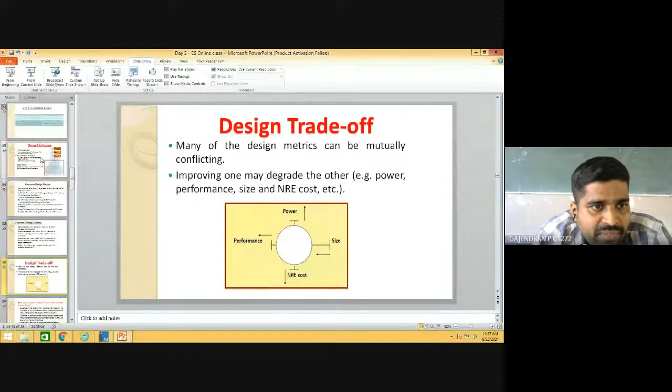Today's class is a continuation from our last class discussion. Last class, we stopped our discussion somewhere in the design metrics and challenges. Am I correct, sir?

What do you understand from the design challenges? Any one or two keywords you remember about the design challenges? Simply type the keywords you remember regarding the design challenges.

Industry space - okay, then anything else? Employees, okay. Then materials used, very good. Then quality and cost, okay, anything? Yes, very good, very good.

So whenever we start designing something, in our case we took a mobile phone as the example. So whenever I start designing something, I think about how to start my manufacturing, so we will start from scratch. We will have some pre-works - pre-works means what type of thing I need to manufacture, what are all the components I need. Those kinds of paperwork we will do.

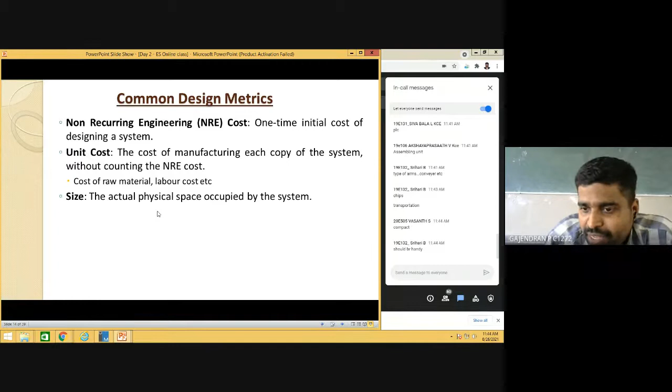For the same price, for the same mileage, what size do you think a four-wheeler should be? Is it that you will think again compact? No, more spacious, so it should be bigger. Am I correct? For the money we pay, we want more space.

The size, in the sense, is not always small. It depends on the application, it will vary. For most embedded applications, a small form factor is needed.

The form factor means many features we are going to accommodate in a smaller size. For example, if you consider an embedded system, I need RTC, I need analog to digital converter, digital to analog converter, display interface, camera interface, and PWM generation. Likewise, if you think about the hardware, you will list many things.

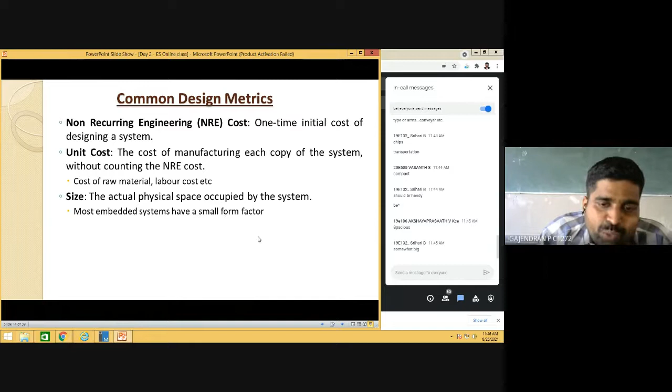As far as the user is concerned, the user will ask for Wi-Fi connectivity, Bluetooth connectivity - what else will you ask? Dual core, 4-core - like this you will ask for many features, but all these features need to be accommodated in a very smaller size. So that is the form factor - how we accommodate the features inside your chip as well as your particular product.

Then performance - yes, performance. It's throughput - throughput means the time taken to produce the particular output. Throughput should be at a higher rate. For a given time, I am accessing Google Meet, and also I am accessing Instagram, and also I may access Facebook.

Like that, I am doing multitask in my mobile phone. Am I correct? At that time, what should be my performance? It should not degrade, am I correct? So performance wise, whenever you do the design, you need to give some consideration to the performance also.

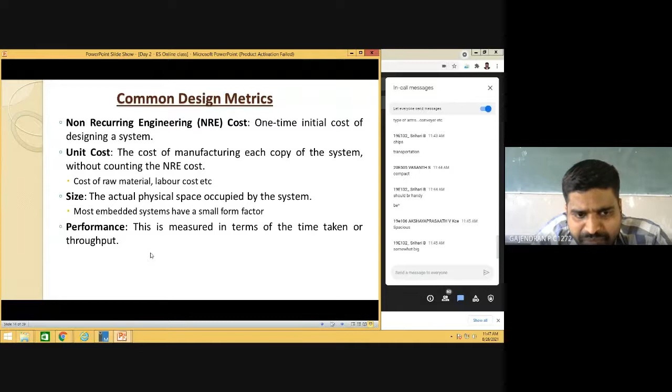Then one more parameter is the power consumption. Nowadays it is a very big research area, especially in the Internet of Things. Say in IoT without embedded, IoT is nothing. You know well, am I correct? So whenever you talk about the Internet of Things, if you want to connect the things, obviously you need some controller, am I correct? So how long my battery will stay back and it will serve my function.

Okay, for the tiny applications and all, they are spelling the power duration in years - 10 years, 5 years, 6 years. Like that, they are giving the power backup in the particular application. That is without recharging. One time we charge and give it to the application, how long it will prolong. It's a very big thing.

For that you need to concentrate on hardware as well as the software. Using software also you can do plenty of magics to get the lower power consumption.

Then flexibility. What is the meaning by flexibility? Able to change the functionality. May I ask you one thing? Is it you people are changing or updating any functionality in your mobile phone after you buy? Say yes or no. Are you doing this functionality updates or changes in your mobile phone once in a while?

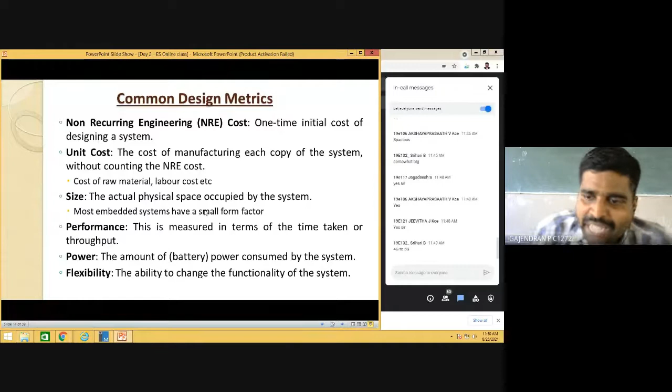It is not simply within a time. If you download the software, your mobile phone won't support from 4G to 5G. But other functionalities within the hardware you can do it. So the hardware design should be done with an extensive mindset. Within a year, if hardware fails to update some advanced things, no one will like that product.

Okay, yes. So please note down this common design metrics. First two are related to money, especially remaining things also related to money. But remaining these four points are a little more technical points. So please note down this. You no need to write everything, at least you write these keywords.

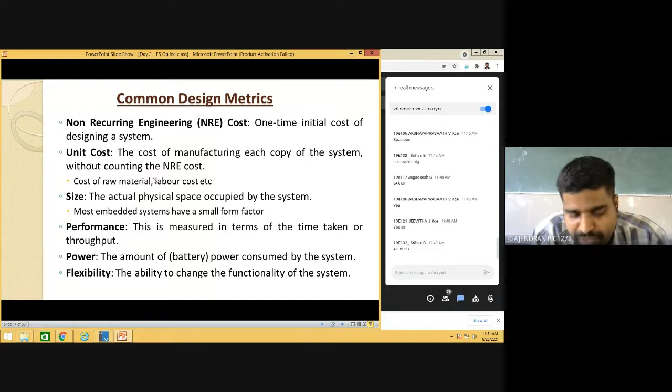few more design metrics - maintainability. How easy or difficult it is to modify the design of a system. Most of the time, especially two-wheeler, the youngsters always love to change the design, am I correct? Manufacturer gives the design, and he will change it - they will change the silencer, then they will change the braking system.

How flexible or easy it is to do the modifications. We will buy a petrol engine, later we will think we need to change it to diesel or gas. Like that, people will think how to modify the same product with some other feature. So whatever needs to be done, if our system is adaptable, that is called maintainability.

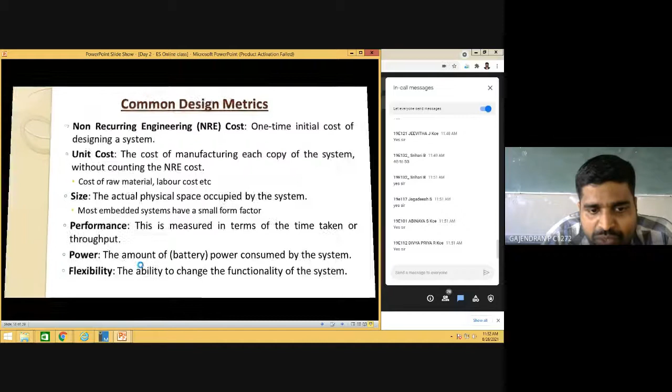Then time to prototype. So this is a very, very important key factor. We constructed the factory, we estimated the cost for the unit, then we consider the remaining factors also. Now we are starting to think about creating a mobile phone.

Okay, same example, I am sticking with the same example. Actually the process of these things, how it happens in the industry - first the R&D people, the research and development team, will design something. The very first work will be taken care by the research and development. The R&D people will do some designs, then they will come with some mathematical equations, then simulation, then they will give some approval to the production people to do the production.

Is it the production people will do the mass production? Is it the production people will start the mass production on day one itself?

Do they do mass production? Say for example, day one they give the design to manufacture, day two they start manufacturing 2000 phones per day. Will they really do that? No, because the R&D people themselves have doubts in their design. So what will they do? The first and foremost thing they will do is a prototype.

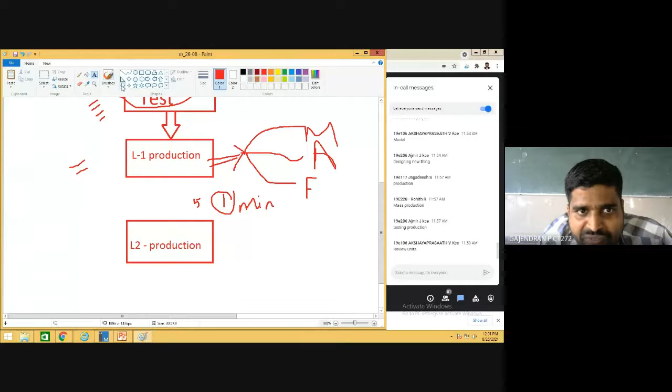Is it clear to everyone? Any doubt in this? Is whatever I said really happening or not in our day to day life? Please say yes or no. That's enough, please say yes or no.

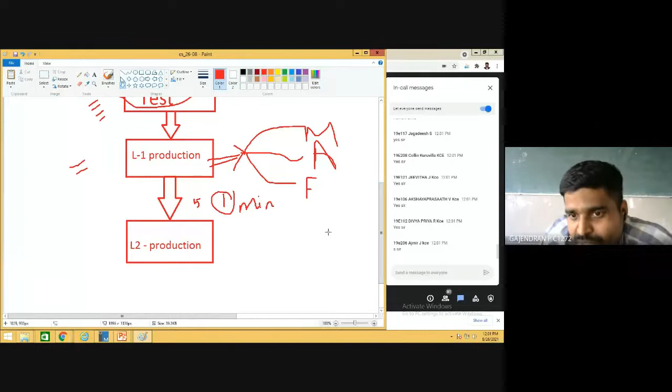Yes sir, obviously, knowingly or unknowingly, we people are doing some testing work from our side. We test it, sir - those companies are using us as testing engineers, because whatever coding they have written in the mobile phone, it is not possible to test every line of code. So for that purpose only, they throw the product in front of the customer and allow the customer to access it, taking their input. It's a very, very big thing related to the prototype, making the product and selling.

Time to market, very, very important. There will be a big clash in the film industry too - time to market, am I correct sir? They have different products in their hand in the name of films. Am I correct? The story is the core there. Time to market.

Should we release for Deepavali or release for Pongal? If we release for Deepavali we can earn this much. And also, who are the competitors releasing at the same time? It's a very huge industry.

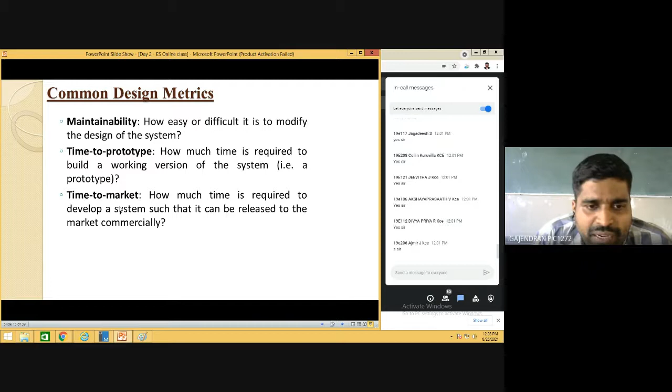Don't think the film industry is just an entertainment industry not using much technology. The film industry nowadays uses all the technologies we are speaking about - artificial intelligence based movies are starting to release, AI based songs, AI based fight scenes, they are doing like that. Wherever money is flowing much, like cricket or other sports media, they will use technology there. If you watch the Olympics, they used many technologies. So wherever money flow is high, technology will be used in a very extensive way.

If you take the mobile industry again, you have multiple competitors - Samsung, Redmi, Nokia and others, am I correct? Once upon a time they were the masters in the mobile industry. Time to market plays a vital role because you spend huge time and money to create a product. If you fail to sell at the right time, you will lose the entire market.

If you know the history of even the browser we are using in our discussion - the Google Chrome launch also got delayed for a week. Before that itself, the things were leaked, and Sundar Pichai was a little disappointed with that. But no one could clone it within a week, am I correct? Because those people had plenty of features in that particular browser. Before launching itself it was leaked, but no one was able to duplicate it. Without making much delay, they launched the product.

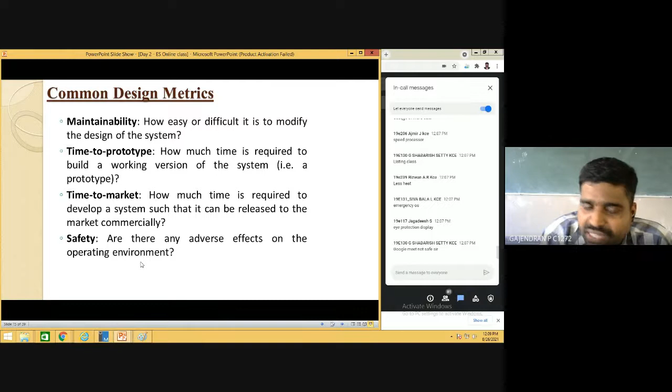Okay, yes, that's all. Now you will see some trade-off points related to what we have discussed so far. Okay, many things are getting mutually conflicting. Then the power, performance, size, and the non-recurring engineering cost we need to improve. Okay, if you consider this circle,

our ultimate aim is to have this as a circle. Okay, if you pull this shape, the shape changes. Then to bring back that shape, I need to sacrifice something. Okay, so this is a 4 category, initially we discussed with 3, now here we are discussing with 4 categories.

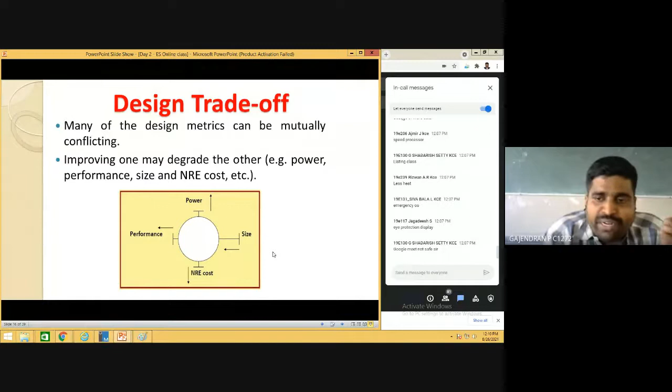Okay, think about this. And whenever you are doing any project or product, or whenever you people may do any startup, at that time you need to think about these points in a detailed way. Okay, and it's very, very important. You people should know why you are studying the embedded system. Okay, many of them are thinking why I need to read about the software.

I plan to become only a software engineer, why do I need to read about hardware? And there are a few people telling that I am going to become a hardware engineer, why do I need to think about software? See, software and hardware always join hands to create the product.

Okay, if you take a human body, the software is like the brain and organs, and the skeleton of our body is your hardware. Without the skeleton, you can't fit these eyes and other parts in your human body. Okay, the skeleton or the backbone is your hardware. Using the backbone, we are enjoying many things, that is your software. These 2 things need to join hands whenever you are doing any work.

Okay, so why we are discussing this point here means whenever you are designing any product, you need to think about these things, hardware and software. The hardware and software both are related to your money - how much I am going to invest on the hardware, how much I am going to invest on the software is very, very important. And one more thing,

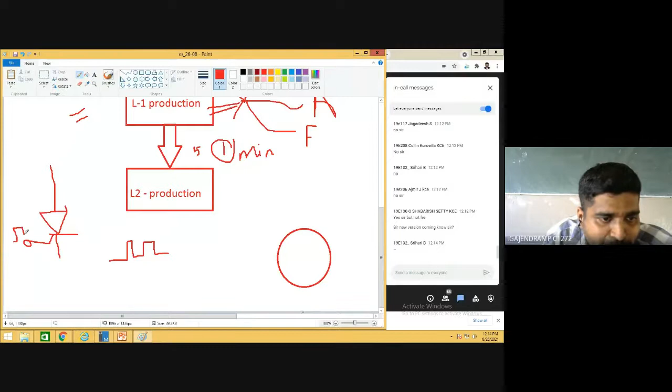Why do I need to remember these things? See, since we people are from EEE background, you people will study power electronics, and at that time you will think about the firing angle, how to trigger my device. You people know about the SCR, a semiconductor special device. Here, if you give the gate pulse, you can do a lot of magic with this device.

So how to create this square wave? Even using the digital input output pins, you can do this. But these PWM techniques are very powerful things to create this gate pulse. Likewise, you need to think about your hardware in an extended way. And one more thing - what the industry likes is, whatever hardware features you are thinking, try to get all the features in a single silicon chip.

If you choose one IC, you should bring everything into that IC itself. If you tell the industry person you are giving something and you add one more chip externally, they won't encourage it, because it will kill your form factor - the size of the product will get enlarged.

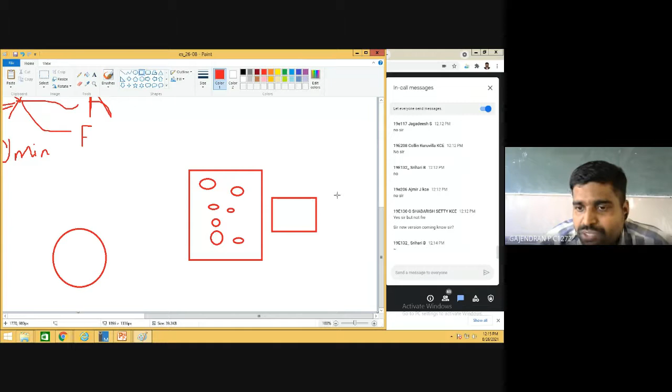So what you need to do is, whatever features you are thinking, choose the component, choose the chip or the controller itself having these features as an inbuilt function. Then for software, obviously you need to think how smart you can control this hardware, how smart you are writing the software design. Hardware and software co-design is very important.

And one more thing - if you take one master industry in the embedded system, very well known to you people, it is Robert Bosch, an industry. I hope you people know. There the recruitment will happen in 3 levels: one is hardware, second is software, and the third is co-design, hardware plus software. So the demand is huge in this sector. Hardware people are available enormously, software people are enormously available in the industry, but clubbing these two, that is called co-design - engineers are in very high demand in the industry.

You think about any industry nowadays - IoT industry, artificial intelligence, deep learning, any technology - you need some computational device to do the particular task. So there you need to write some coding, and that coding needs to be dumped into the hardware. Then you need to connect some peripherals. For example, I'm doing some artificial intelligence face recognition system - I need a camera, I need some controller, I need some algorithm to run.

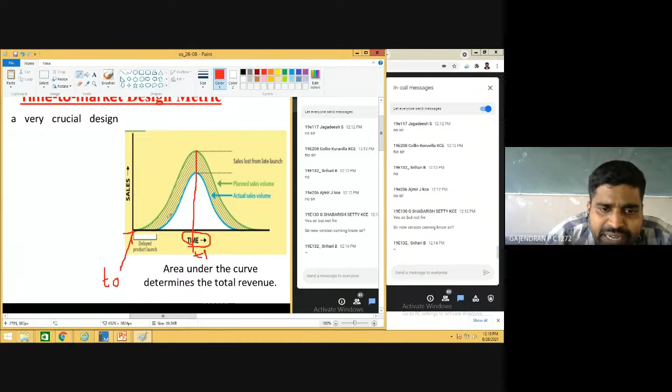Why it is not immediately getting peak? It is getting time to get peak. Can anyone unmute and say please, why it is taking little time to get peak? Any idea? Why not immediately?

Actually, what will industry like? Once they launch it, they need a peak like this, correct? Launch panna odane peak varano, but it will take some time to get peak.

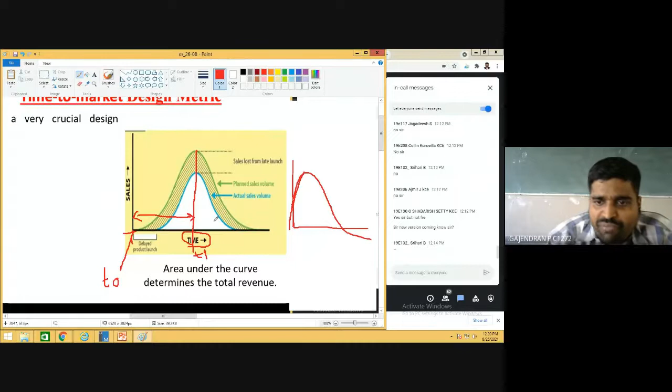Any idea? Take again mobile phone - usually what people do whenever they want to buy a new product is get recommendation from another, that's the very simple answer. Whenever you think of a new product, you will get some feedbacks and reviews, and those are promoting the people's knowledge.

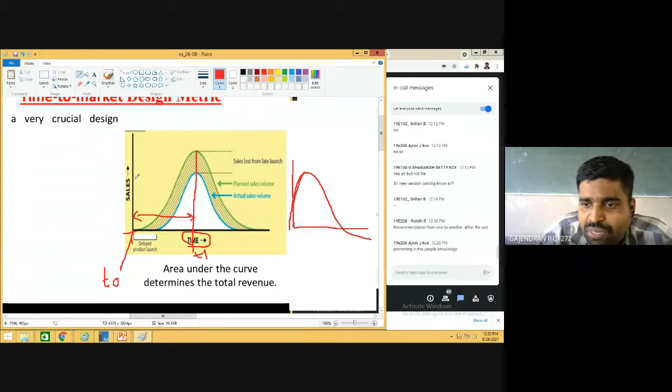I want to reveal one secret here. There are some agencies working in social media to give 5 stars. When you launch a product, to give it 5 star and 3 star ratings, there are some industries working, making us fools. They give the star rating - if we give some money, people work 24/7 and they will make you get the star rating. Okay, so this is the thing.

We will skip those tricky parts and come to this. I am launching the product, it is getting peak, it is taking a small increase, and after some time it is getting decreased. Why, sir, is it getting decreased? Any idea why it is decreasing? Why not it stays at the same level?

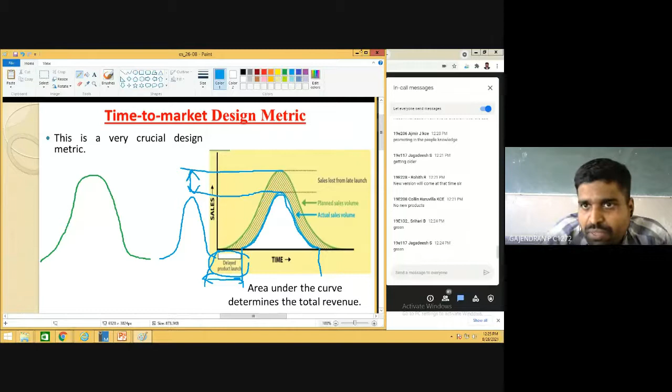Please compare this peak - what is the huge difference between the delayed peak and the right time peak? So what we have inferred from this graph is, whenever you think about many factors, the ultimate aim is the revenue. If you want to get good revenue, what do I need to do? Please tell, what do I need to do - beyond design, beyond R&D, beyond advertisement, what do we need to focus on? Can anyone tell me what you have inferred from this graph, please?

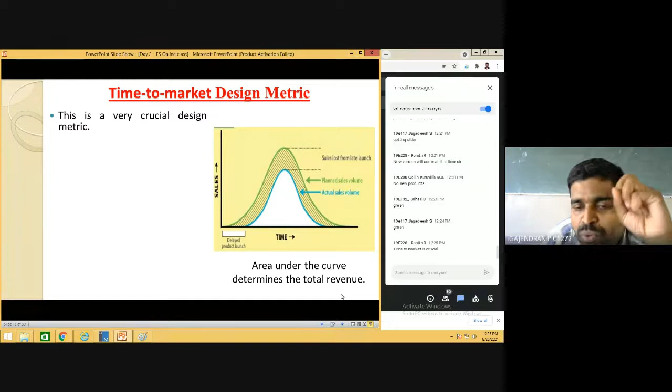Time to market, very good. Rohith caught the key point - time to market. If you delay, it will give more penalty. So I need to avoid that. How to avoid that? That you need to decide. You need to reduce the delay as low as possible.

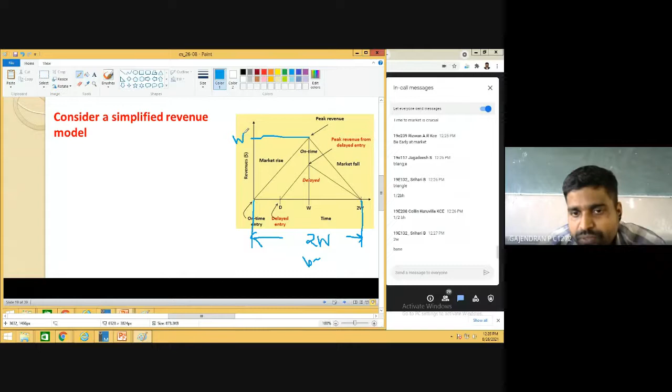So I need to find the area of the particular triangle. So this to this distance is what? What is this? 2W, very good. This is what? B, am I correct? What is the height? Consider the height is your W. And what is this D? Can anyone tell me what is this D? D is the duration of your delay. This length is your D. So you have two triangles.

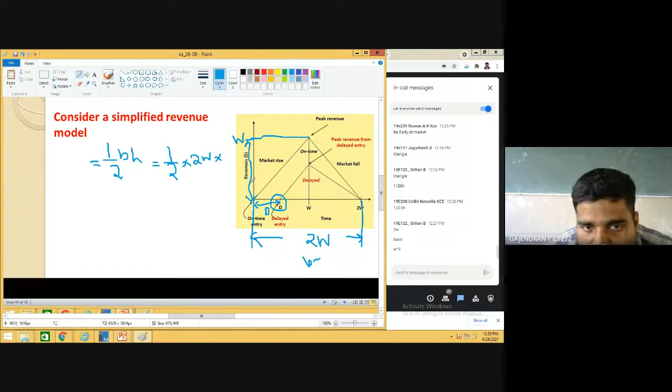If I make the product at the right time, I have one thing - half into B into H is equal to how much? Please help me, what is your base? It is your 2W into what, sir? Height - what is your height? Your height is also W. Okay, Srihari gave the answer. So the 2 will get cancelled, you will get W square. If you are making the product to launch at the right time, this is the revenue you get - that is your W square.

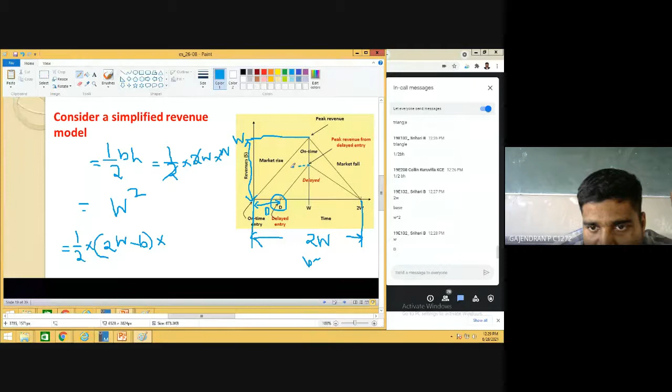Then, if you are making some delay, means what? The entire length 2W, I need to subtract with D. So that means half into - what is the base? 2W minus D, into what is my height? So this is the difference - in the difference you consider as again D. What you will get? Sorry, here I need to put D. What you will get? W minus D. Is it clear, dear students?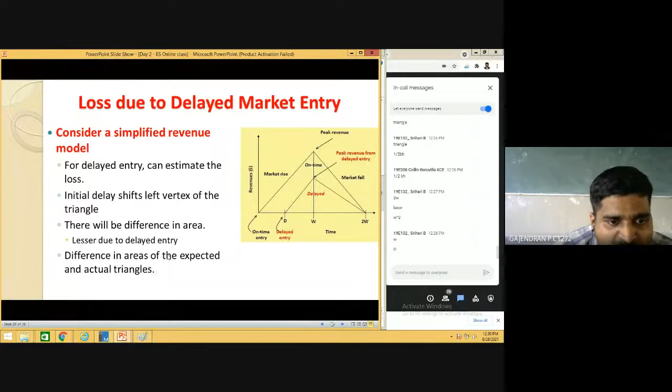With this idea, you look into this thing. Product lifetime is 2W. Maximum sale occurs at W - this is the point at which you are getting the maximum sale. Then market rise and market fall defines a triangle revenue graph. So using this triangle revenue graph, you can calculate the total area of the triangle that gives you the full revenue. Then you can find what is the delayed revenue. Put together you can calculate the revenue loss. How to find the loss? On-time minus delayed area. If you manipulate, you will get the revenue loss. If you compute these equations, you will get the end result as this one.

Please note down this equation, because using this equation we can do some calculations. What is the revenue loss? On-time minus delay time - so if you find the difference, you will get the revenue loss. What is the percentage of revenue loss? How you can find it? That is the ratio between revenue loss divided by original revenue, into 100. That's all, only these mathematical equations you should remember.

Let me give some homework to you people. Take a screenshot of this one. The duration is 2W - 2W is equal to 52 weeks, D is equal to 4 weeks. What is the percentage of loss you need to calculate? Calculate it and come. Then remaining things we will discuss in the next class.

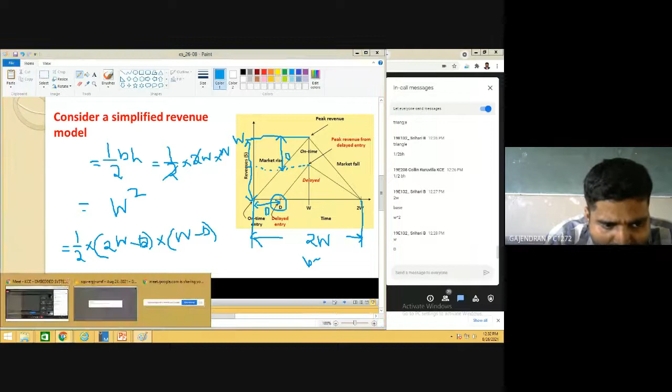Thank you very much, any doubt so far you can ask. Let me conclude the class. What we have discussed - we discussed little design metrics, then we discussed some revenue model, where we are going to do some mathematical calculations. Those calculations in detail we will do in the next class. Thank you very much. Any doubt you have, you can ask, else we will wind up the session.